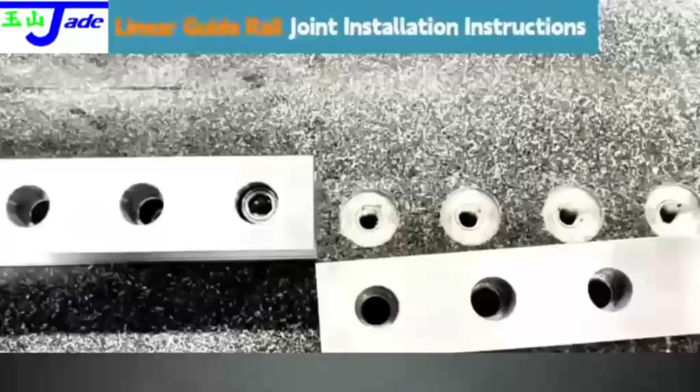Today we will show how to install jointed linear guide rails. When the required rail length exceeds the maximum rail length, two or more rails will be joined together.

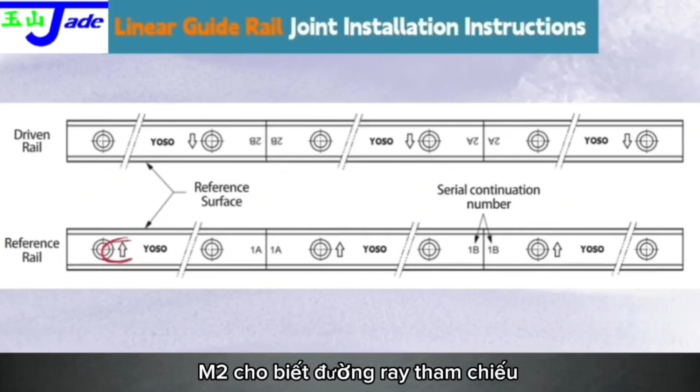Each rail has identification marks. M2 indicates the reference rail, and the arrow shows the reference surface. Rails with the same number belong to the same set. Install them in the order A, B, and C.

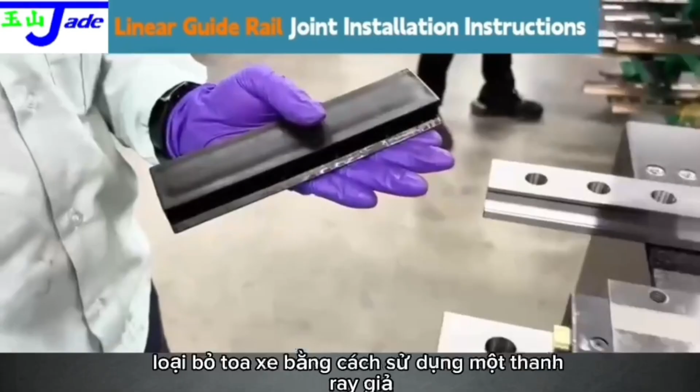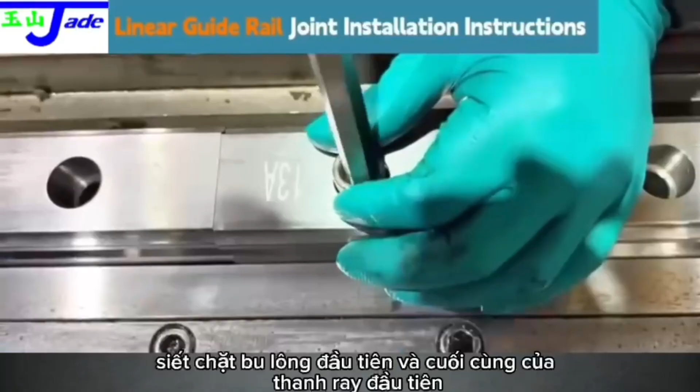Let's start assembly. Remove the carriage using a dummy rail. Clean the rail bottom, joint surfaces, and mounting base. Place the jointed reference rails on the mounting surface in order. Tighten the first and last bolts of the first rail section with about 10% torque. Make sure the bolts are centered in the counterbores.

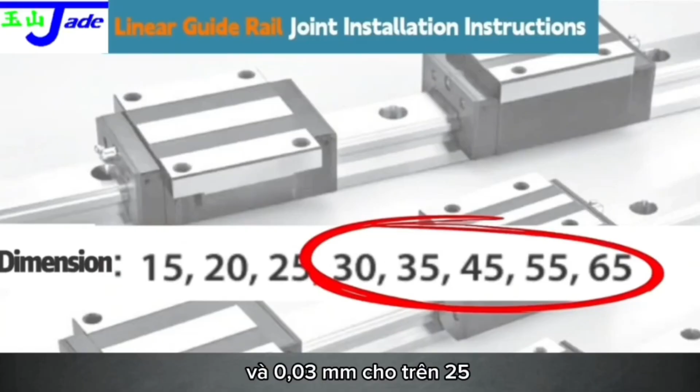Insert a shim between the two rails. Select the shim thickness according to the rail size. Use a 0.02 mm shim for size 25 and below, and 0.03 mm for above 25. Using about 10% torque, lightly tighten the first and last bolts of the second rail.

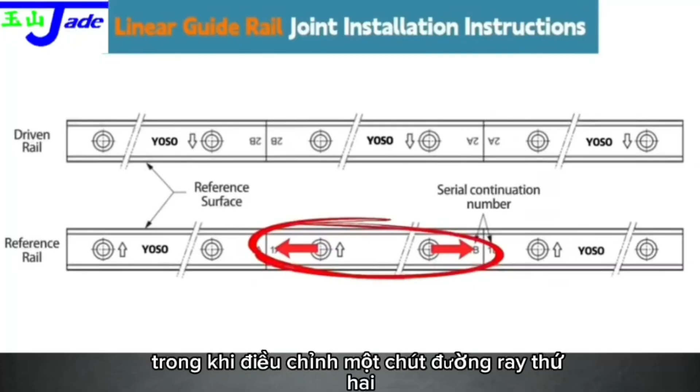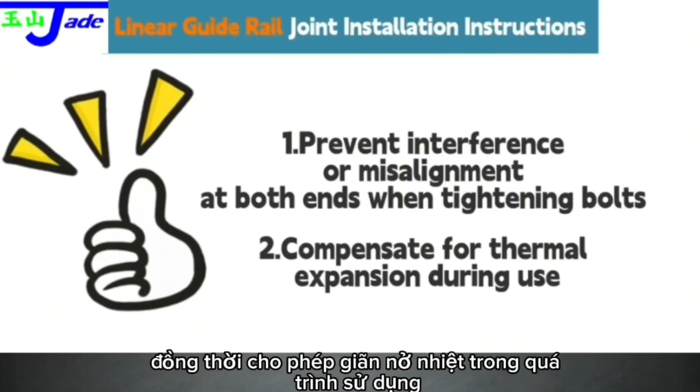Move the shim back and forth while slightly adjusting the second rail. A slight resistance means the gap is correct. This helps prevent interference or misalignment at the rail ends when tightening bolts, while also allowing for thermal expansion during use. Install the remaining rails in the same way.

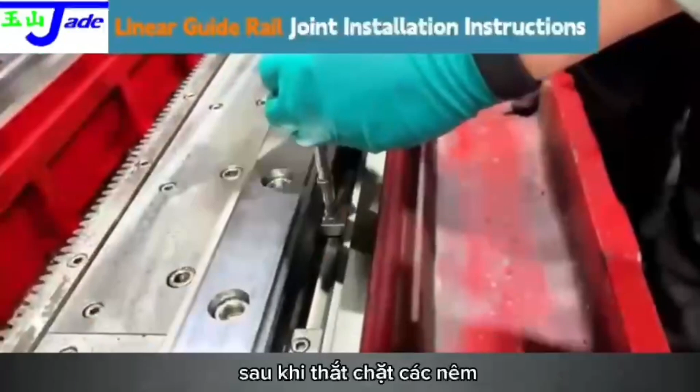After installation, tighten all rail bolts sequentially to about 10% torque for the first pass. After tightening the wedges, tighten all rail bolts again in sequence to about 50% torque.

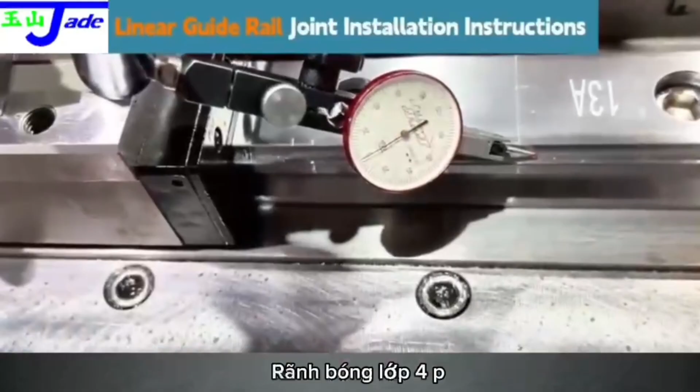Reinstall the carriage using the dummy rail. Check the ball groove accuracy at the joint. For 4P grade, ball groove deviation at the joint should stay within 3 microns. At this point, the installation of the reference rail is completed.

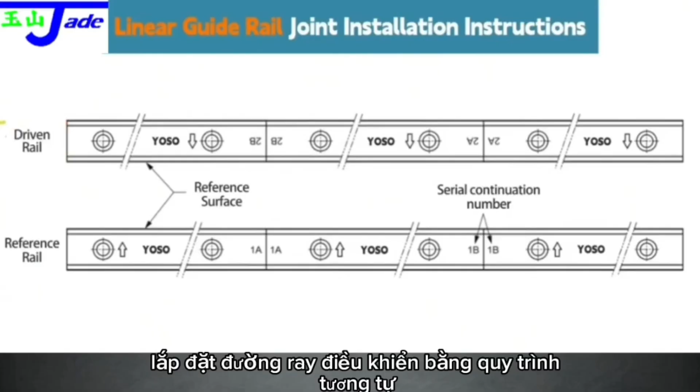Install the driven rail using the same procedure. After installation, check the rails like a full-length rail. Once the inspection is passed, tighten all bolts sequentially to 100% of the specified torque.